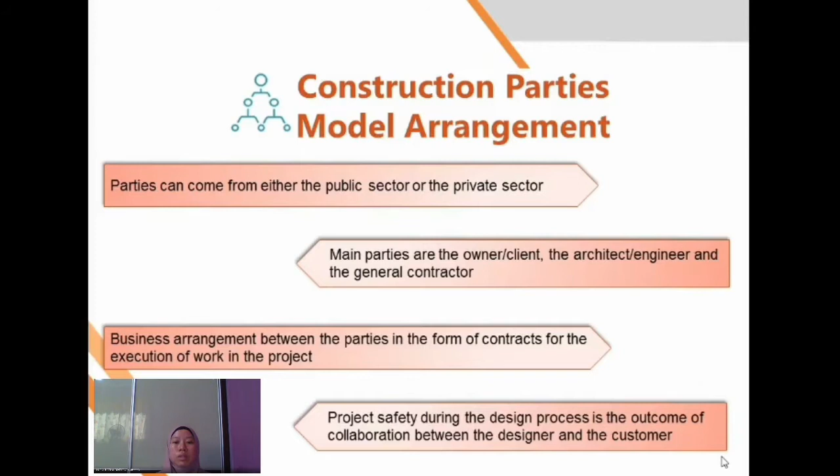Project safety during the design process is the outcome of collaboration between the designer and the customer, based on how the parties collaborate, interact, and coordinate with each other.

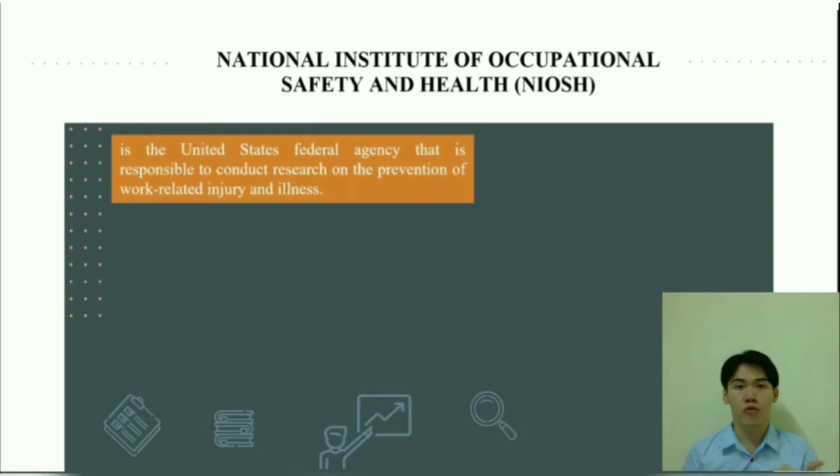Next is National Institute of Occupational Safety and Health, NIOSH. NIOSH is the United States federal agency responsible for conducting research on the prevention of work-related injury and illness. The function of NIOSH is providing national and world leadership in preventing work-related illness, injury, disability, and death by gathering information and research and generating products and services for prevention.

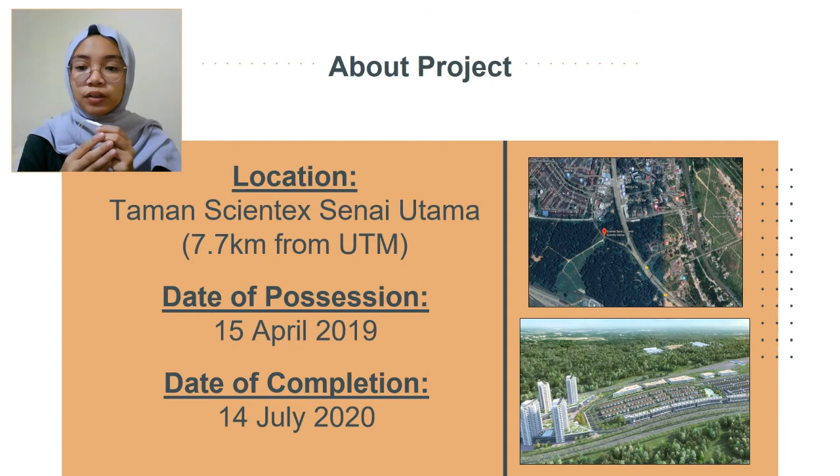The contract sum for this project is 14,578,000 ringgit. As we can see in the picture, the construction site is surrounded with residential buildings and commercial buildings.

This is the site plan for the project. The red arrow shows the main entrance of the site, and the blue one is the residential blocks to be constructed.

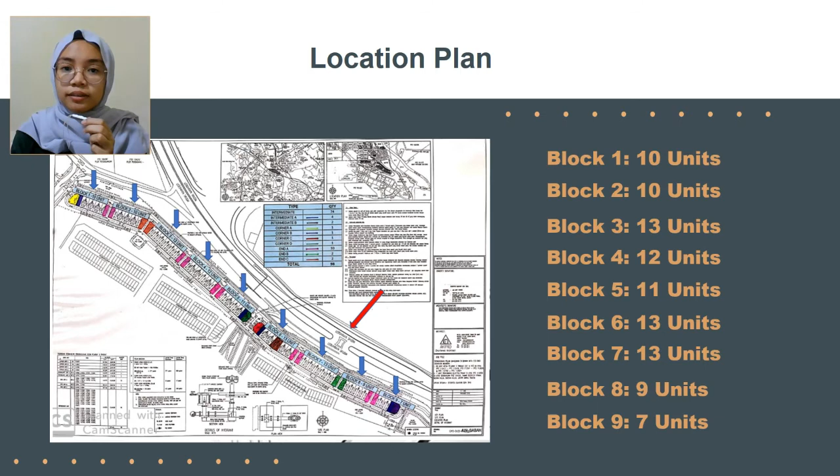In Malaysia's construction industry, there are many requirements of site safety and health. These requirements help to provide a safer working environment at the construction site, such as SHASSIC, professional teams, safety and health equipment, green card, insurance, and HIRARC.

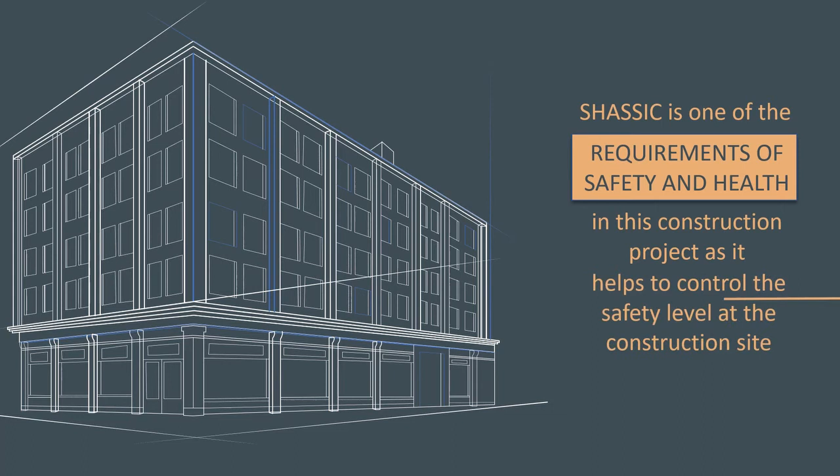The first requirement of site safety and health is the SHASSIC assessment. The Safety and Health Assessment System, known as SHASSIC, is one of the requirements of safety and health in this construction project as it helps control the safety level at the construction site. It is a method for evaluating the performance of site safety.

There are four main objectives of SHASSIC. The first is to benchmark the level of safety and health performance of the construction industry in Malaysia. Second, to have a standard system on safety and health assessment in the construction industry. Third, to assess safety and health performance of contractors. Fourth, to evaluate the performance of contractors on safety and health practices at site.

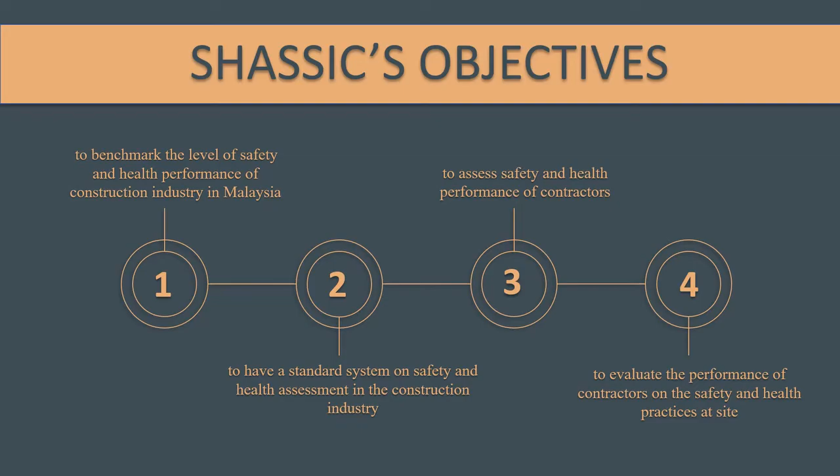Basically, the SHASSIC assessment consists of three main components. The first is document review, where the assessor checks all site safety and health-related documents and records of the construction project.

Second is site inspection. The inspection will provide evidence whether the site safety and health program is being practiced on site or not. The final component of this assessment is employee interviews, during which the assessor shall interview randomly selected employees at the construction site.

Professional team requirement: why a professional team, and what are its goals? Their goal is to monitor workers' safety and to create a safe and healthy environment in a construction site. Who are they? They are the administrative team.

In our assignment, based on the site we chose, the administrative team is led by Inche Zabrani Irfan, who is the safety officer.

Next, what is the duty of the professional team? First, they are responsible for planning, implementing, and overseeing workers' safety at site, and to ensure that the construction project is in compliance with OSHA guidelines.

Now I will discuss the safety and health items and equipment on site. It is basically divided into three main parts: personal protective equipment, construction site requirements, and construction site tools. These safety requirements are very important so they can prevent and minimize accidents at work.

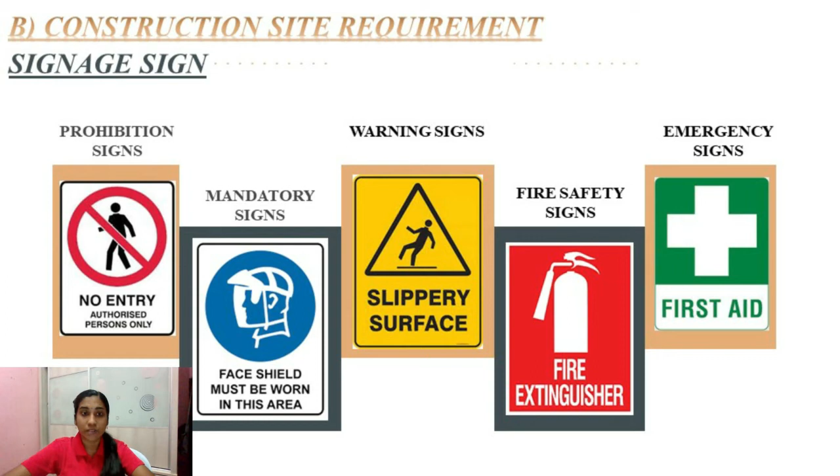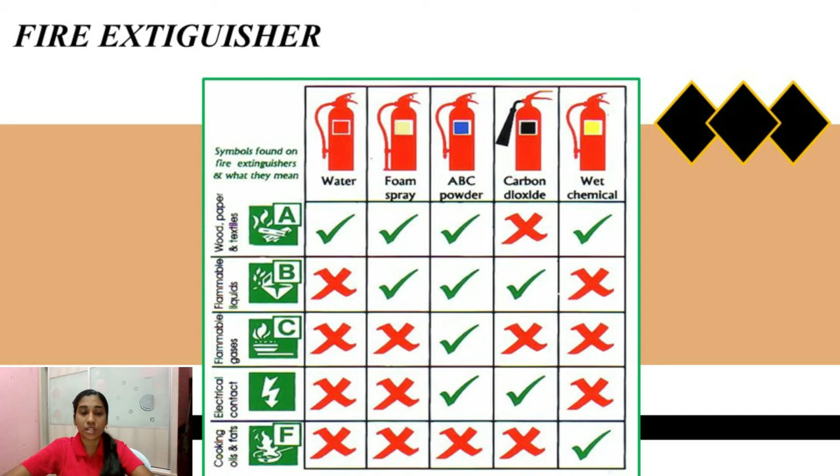Last, emergency sign, which indicates the location or direction to emergency facilities like exit, first aid, safety equipment, etc. Next, storage area, first aid box, and here is the fire extinguisher. There are 5 types of fire extinguisher in the market, based on water, foam spray, ABC powder, and carbon dioxide.

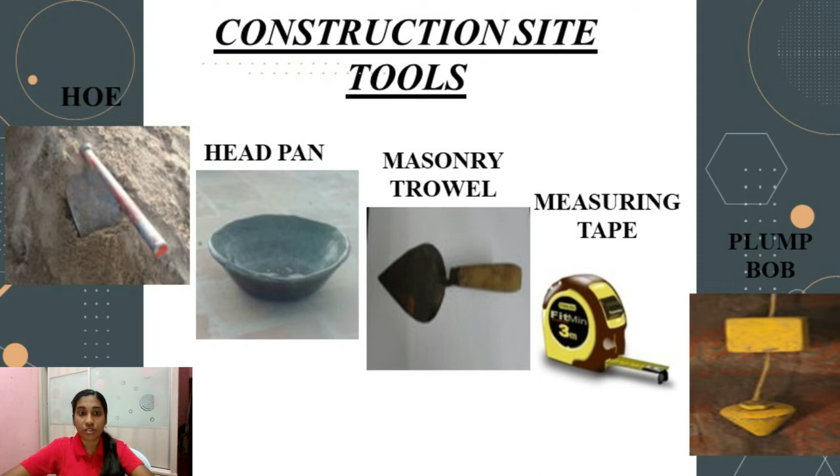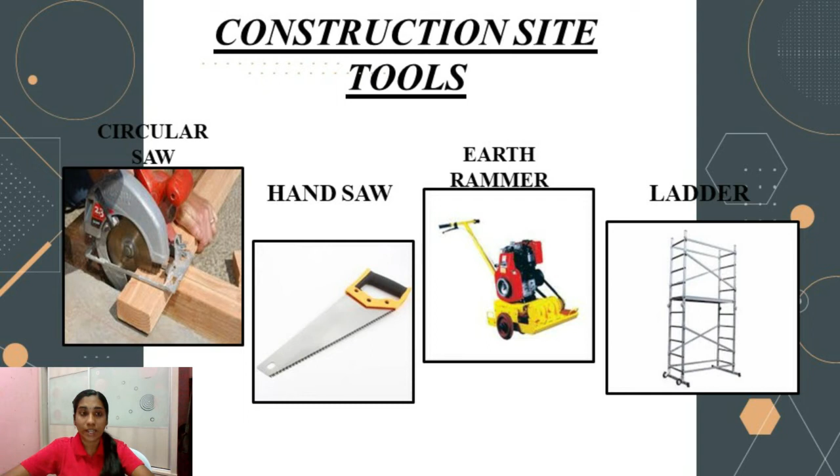Next, construction site tools. These tools are very important on the site so that the site's work can be carried out smoothly: hoe, head pan, trowel, measuring tape, plumb bob, wheelbarrow, concrete mixer, vibrator, circular saw, hand saw, earth rammer, ladder, polisher, and vacuum blower.

The next requirement of site safety and health is the green card. Every individual who works on site is required to have their own personal green card. The individual who has a green card is allowed to enter the site. They must present their own personal green card at the main entrance before entering. CIDB will issue the green card once the individual has completed the safety induction course. The green card rule is very important to ensure that all individuals entering the site are exposed to the basic knowledge of site safety and health.

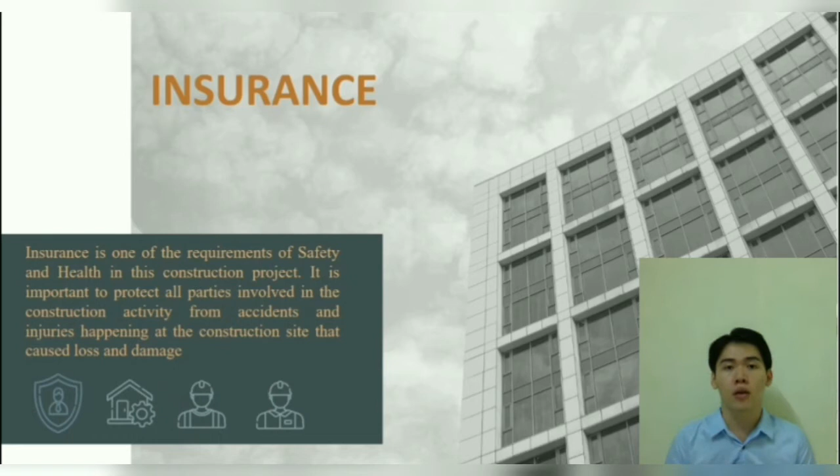Insurance is one of the requirements of safety and health in the construction project. It is important to protect all parties involved in the construction activity from accidents and injury at the construction site that cause them loss and damage.

One of the insurances in construction is Social Security Organization, SOCSO, which is one of the requirements of occupational safety and health in our project. There are 2 different schemes in SOCSO. Number 1 is employment injury insurance, which provides protection to employees if they suffer from employment injury. The coverage includes industrial accidents during duty, commuting, and occupational diseases.

Number 2 is invalidity scheme, which provide 24-hour coverage and protection to the insured. The next insurance is workers' compensation insurance. This provides cover for workplace injury and accidents for workers. Only work-related injury can be compensated. It covers the cost of medical expenses and partial wage loss.

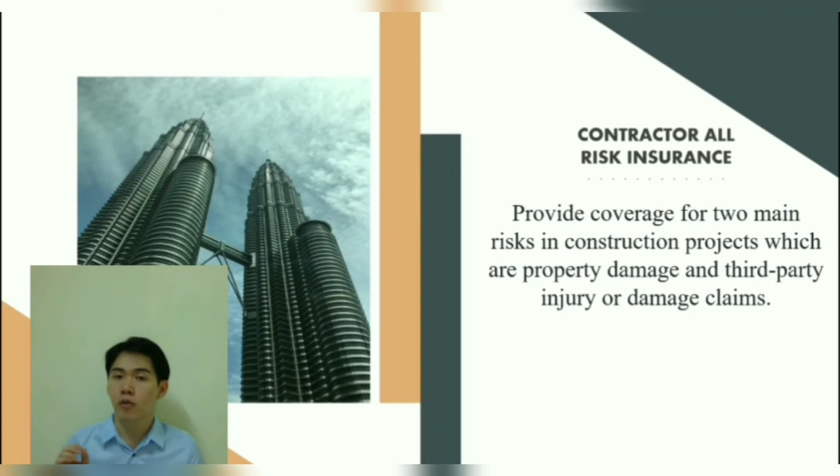Next, the contractor's all risk insurance. This insurance provides coverage for 2 main risks in a construction project, which are property damage and third-party injury or damage claims.

Another requirement for site safety and health in this project is HIRARC. So what is HIRARC? HIRARC is the combination of three important control activities: HI indicates hazard identification, RA is risk assessment, and RC is risk control.

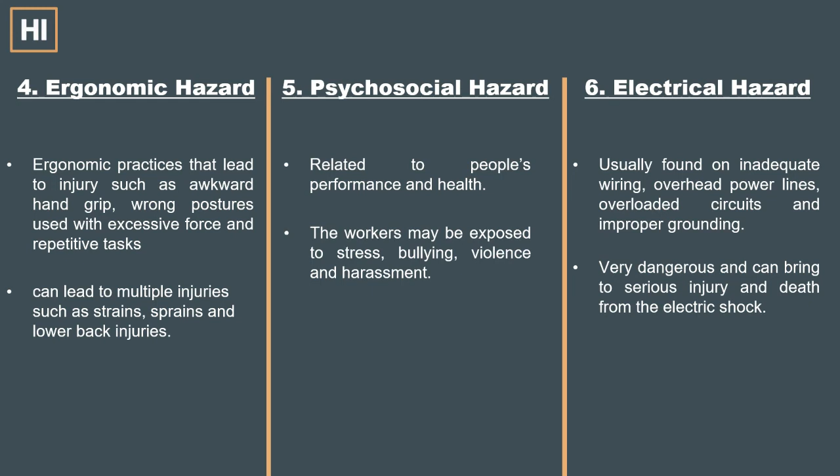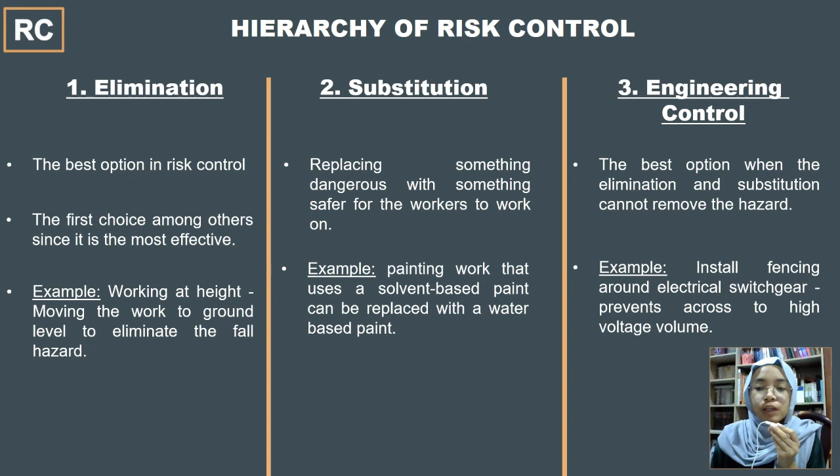Risk assessment should be recorded and reviewed periodically, and if necessary, updated when there are changes in work practice. Risk control is the last step of HIRAC, and it can create a safe and healthy workplace environment. There are 5 types of risk control, and the selection of control must be suitable with the condition of the hazard.

So there are a few hazards found in the construction site. The hazard is categorized into 2 types: safety hazard and health hazard.

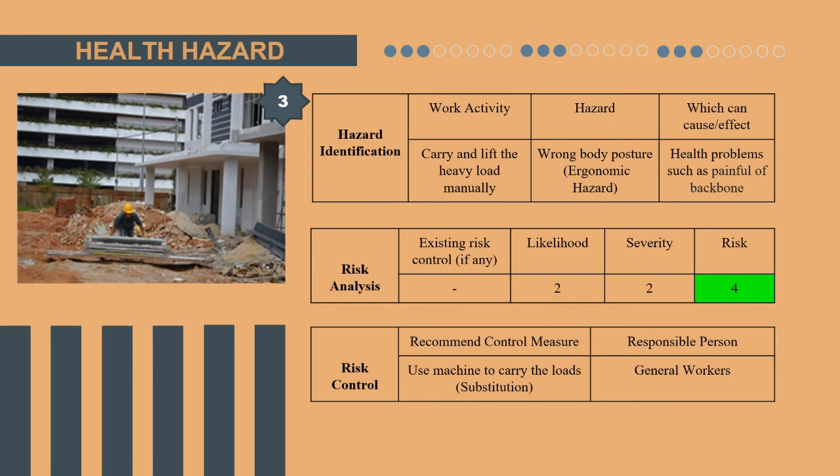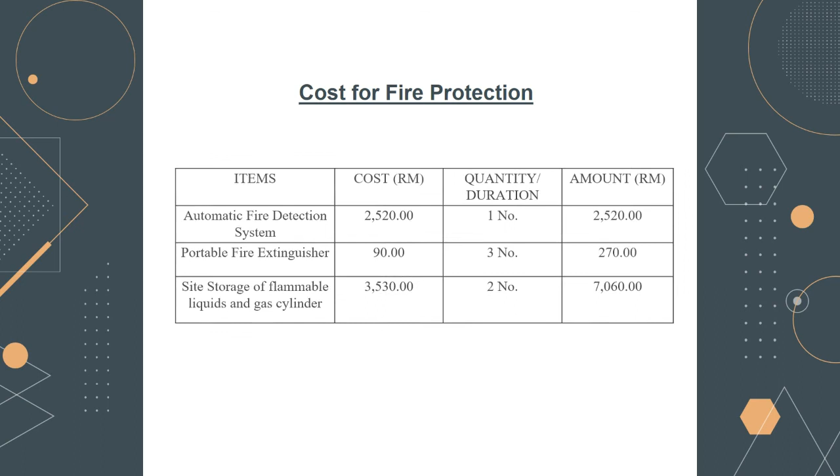We proceed to the detailed list of estimated costs of safety and health for this project. There are 8 item categories that are calculated for this estimation cost. So, the total cost for safety and health for this project is 6.77% of the total contract price.

In conclusion, this construction project of 267 units of double-story terrace house has to comply with the safety and health rules and regulations from the legal authorities. As for this project, they need to follow all the Occupational Safety and Health Act and the Factories and Machinery Act, which have to be fulfilled by the client and contractor at the site. Besides, they need to provide safety and health items for visitors, workers, and site safety if any accident happens during working hours.

Besides, for this project, they need to carry out a HIRAC assessment for safety and health because within that period a construction project is very big and has a lot of activities going on, which means there is also a lot of potential for accidents to happen. Other than that, the construction personnel card, the green card, is also one of the mandatory requirements that each individual needs to have.